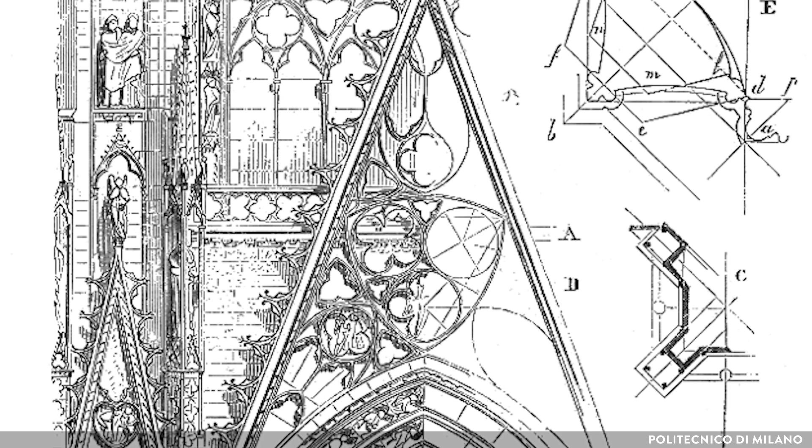As we can see, the requirements of the architectural survey lie partly in the nature of the information collected. Whether in architecture, archaeology, or art history, the practice of survey is a means of consolidating knowledge through the collection and the organization of information around a given object. In that sense, we can speak about documenting an architecture.

At the level of the built heritage documentation, the digital phenomenon has integrated the discipline for nearly 30 years now. In this context, many tools and methods were adapted or developed with a benefit for the acquisition, the visualization, and the analysis. The democratization of many acquisition techniques permits today to create digitizations composed of several millions of data, having a great visual and metrical coherence with the observed artifact. We can evoke 2 main techniques used today.

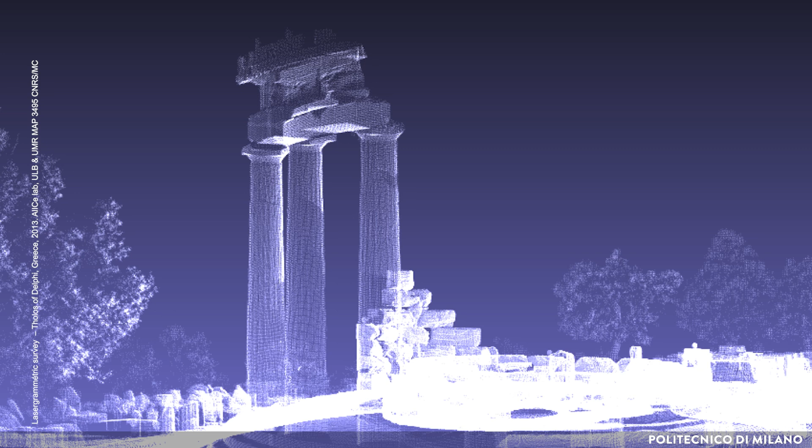On one hand, we have the lasergrammetry or the terrestrial laser scanning, an acquisition technique that uses a light source, the laser, as a means to measure the space surrounding the survey station. Lasergrammetric digitization allows producing point clouds constituted by several millions of 3D coordinates.

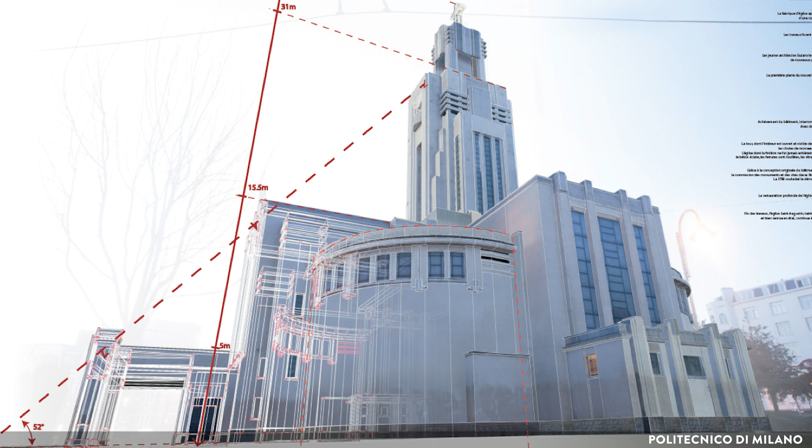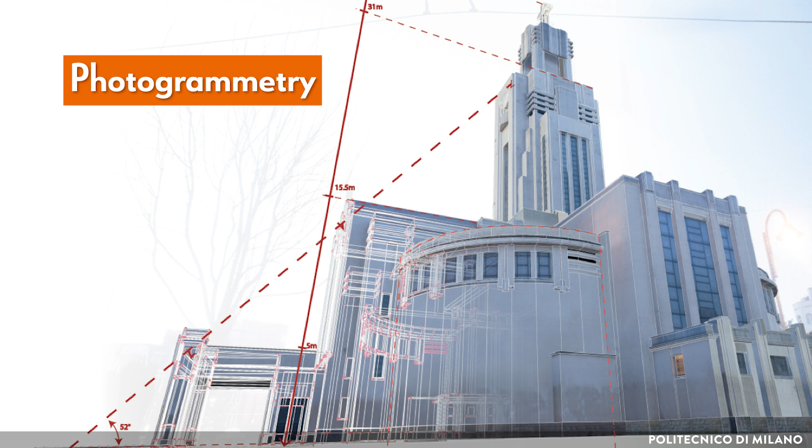On the other hand, we have the photogrammetry, another measurement technique using photographs as a survey tool. This technique is based on the principle of triangulating homologous points to a set of photographs illustrating the same object. We can see the result of a photogrammetric survey with the 3D model integrating the colorimetric values of the photographs.

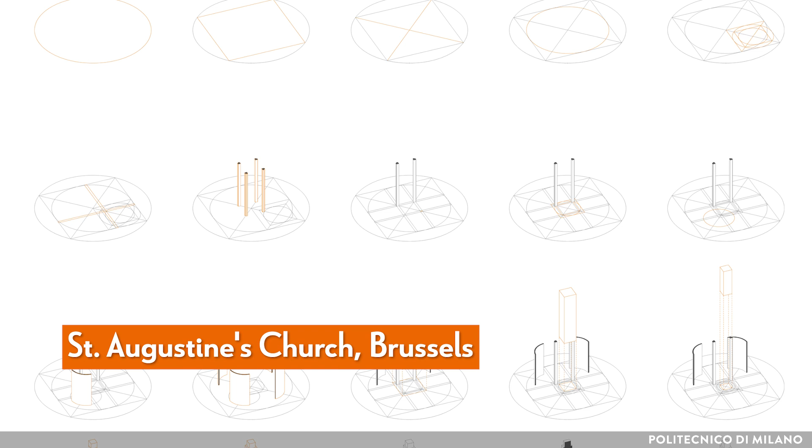As described above, 3D digitization must primarily serve as a base to document the current state of building and support the work of analysis and observation. The point cloud from a photogrammetric survey has no cognitive value as such. As we can see in the survey of a church located in Brussels, the work of representation only makes sense if it leads to a gain in intelligibility.

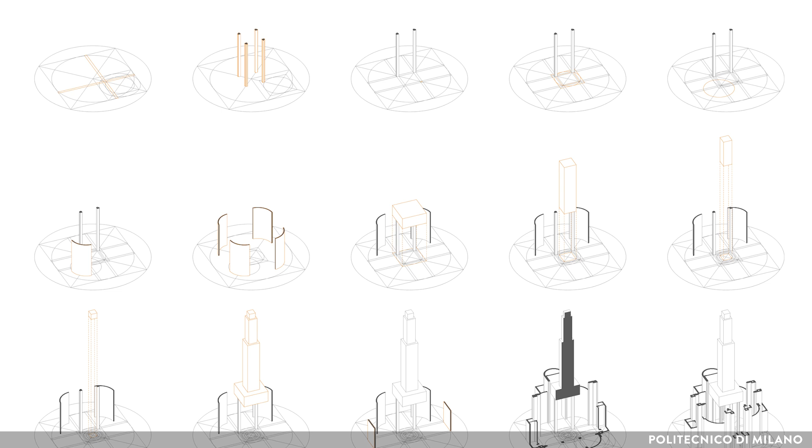In a way, and as I said before, we can consider the architectural survey process as a reverse engineering project, which aims, in particular, to understand the compositional principle mobilized by the architects. It is therefore a question of mobilizing 3D digitization as a means of investigation.

This is particularly the case in this example, where the compositional drawing of the object is highlighted and in correspondence with the exploded axonometry of the project. The object is open, dissected, to convey both information relating to the plan and information of the facades or the section.

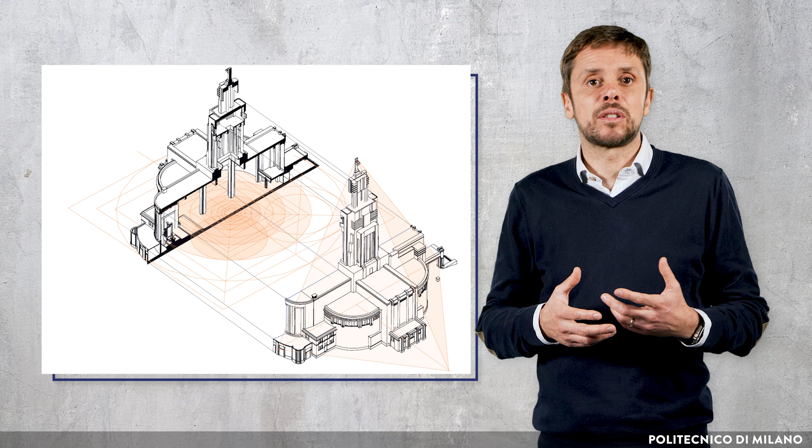In archaeology, art history or architecture, new techniques and digital documentation constitute a major issue for the preservation, monitoring, and digital archiving of built heritage. Nevertheless, in this technological context, it's necessary to distinguish architectural representation from data visualization.

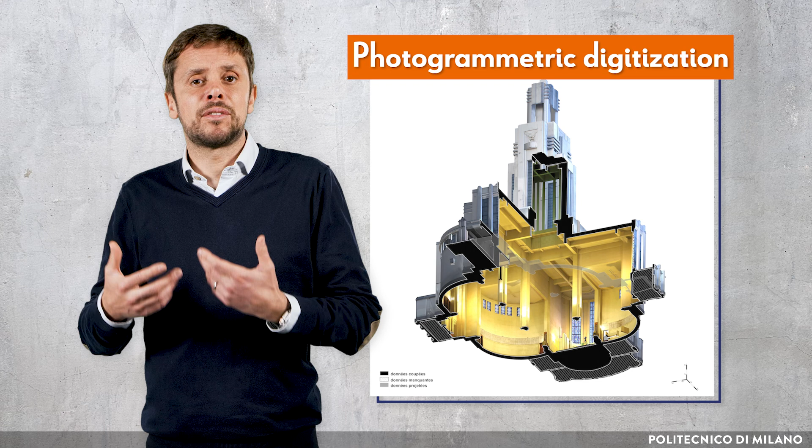So considering built heritage survey also through the lens of analysis and communication is necessary to understand how the digital representation of architecture could become a scientific tool for knowledge sharing. Whatever the degree of sophistication of the digital acquisition tools used, heritage documentation needs to be confronted with the cognitive and cultural issues of the architectural representation.